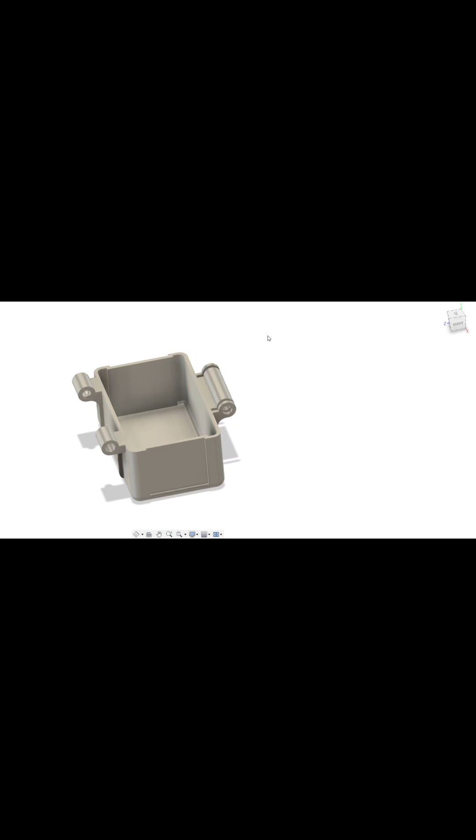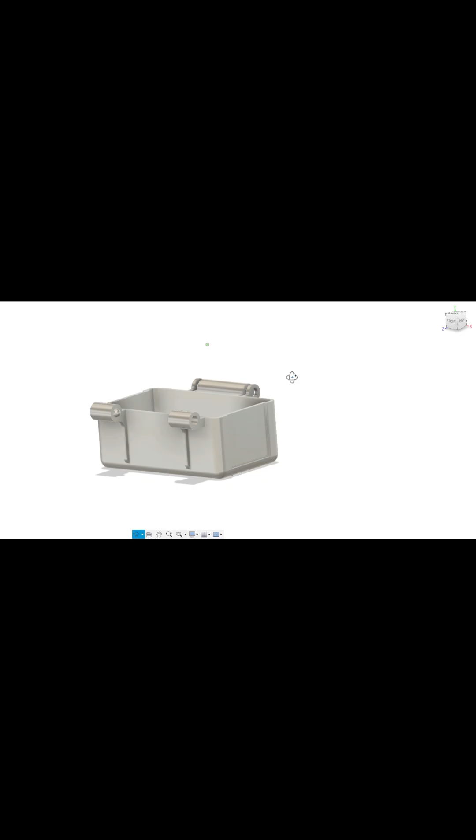Alright, so we got a basic extruded component here. And the aim was to use this component twice over within an assembly to create a hinge and a retainer. So just looking at the single individual component by itself, you can almost see how we could manipulate such an assembly to use just one component to have an encasing.

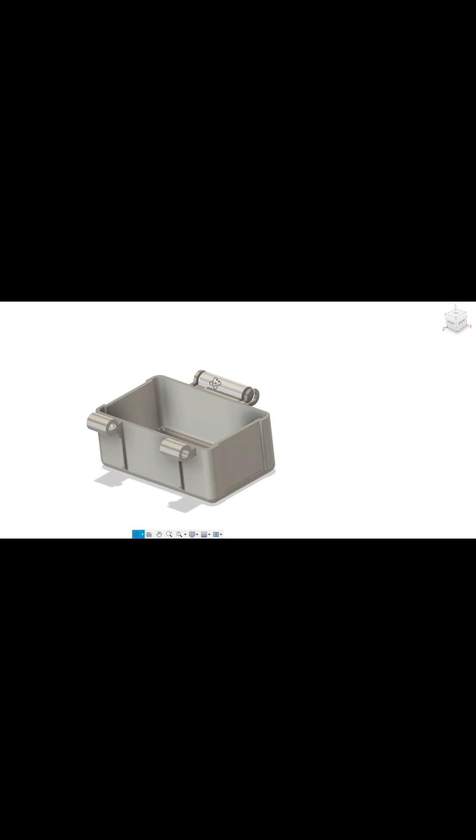We're going to see from the 3D print a little bit later on how that all works out, but some of the improvements that we can make on this design to make it more effective to what we want it to do based on the printout is, well, firstly let me speak about the print, and then we'll speak about how this would be injection molded and some of the considerations that we need to take into account when we're injection molding.

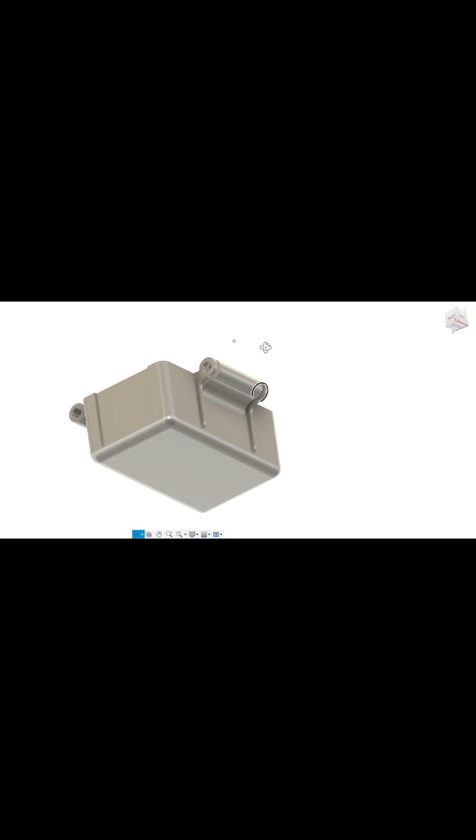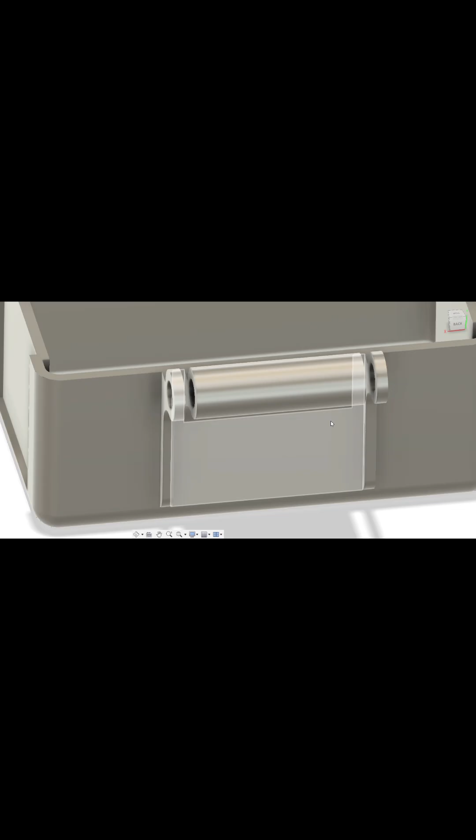So looking at this component as it is drawn right now and how it's come out on a 3D printer, one aspect that needs to be added to this design is you could almost add a detail tangentially over here, a return, or maybe even fill out this material here where we've got the snap detail in the hinge, because that's going to allow us to unhinge and uncouple when we go to the other side. Now this is going to make a little bit more sense when we go into the assembly, but for the purposes of this part of the exercise, we'll just look at this as an individual component.

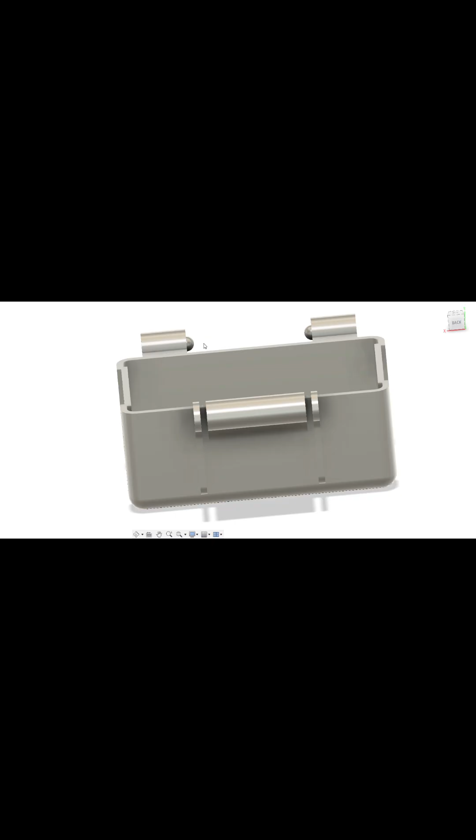The tolerance between this mating face and this mating face here could have been tightened up, so I think we could probably run about half of what we got. We got about a mil tolerance on both sides, but we could probably go about half within that. Another thing to consider is the distance of this snap ball hinge component. This is kind of doing two things. Yes, it is snapping to make a retainer, but also it is the axis for this hinge to open with.

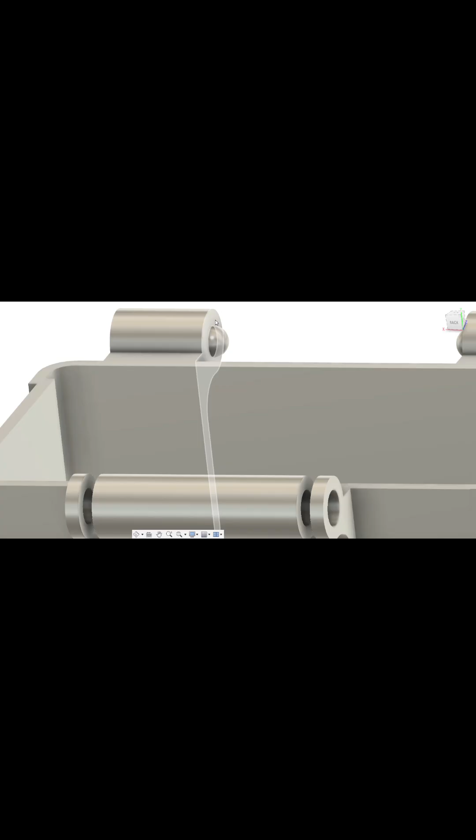Okay, so you can see I've drawn the sphere halfway through this mating face. Now we could really push that in a little bit. That'll give us a little bit more tolerance, but I think it works well enough, as you'll see within the demonstration.

I think really all we need is to increase this material, maybe just a mil or so, or if we're considering injection molding, since this is just a prototype component, we might choose a material that gives us enough flexibility to achieve what we wanted to do by just adding tags there, which when I played around with this after it's been printed, you can see it works reasonably well, with the exception of adding some tags.

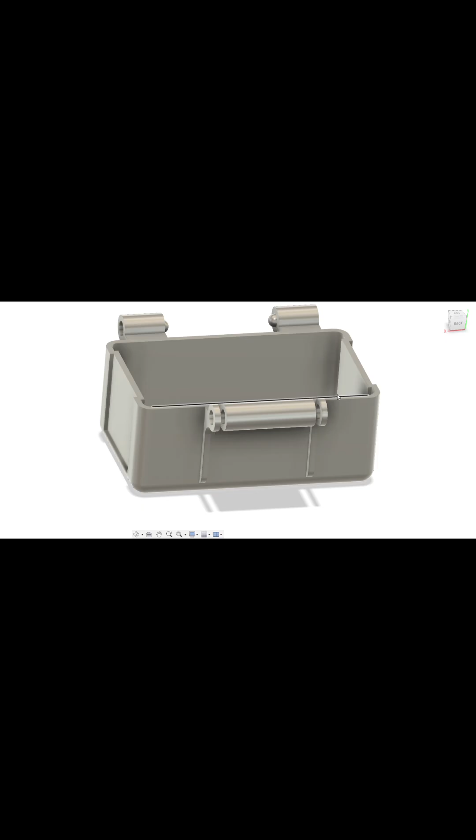Another little improvement is we could run a return on one of these faces, but remember we're using the same component to create a case, right? We have to be strategic on where we put a return on the inside, so that when the assembly is made up, you've got a mating face on the inside that stops the box from rocking to and fro. Now you could really just put that over here, and you'll see when we go into the assembly how that would work.

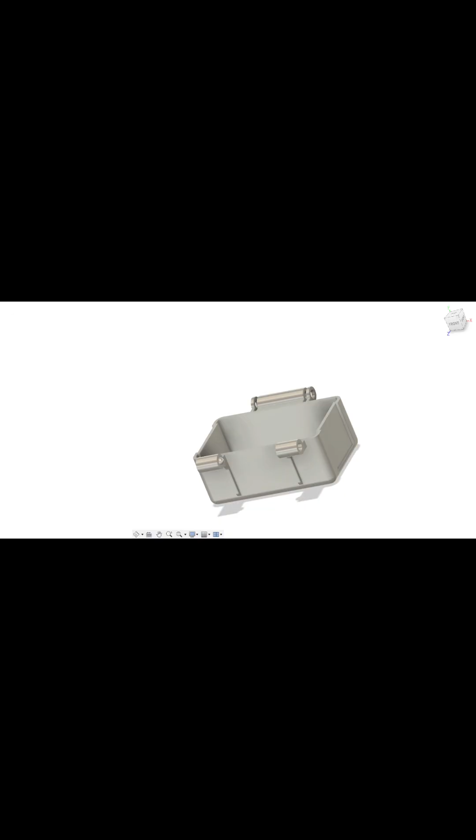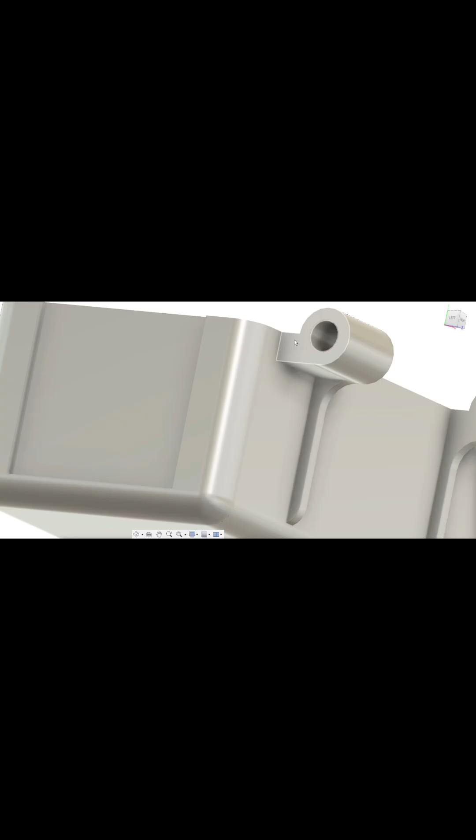Okay, so things to consider when injection molding: probably need a couple of draft angles on the inside. This first extrude we can see here could probably be drafted out before we shell it. And then also, there's a lot of material here that's not material thickness, so that's going to need coring out. Right, that needs to get cut. So you can see I've cored out this to be material thickness, which is about 3 mil if I remember correctly how I've drawn it up. So we've not got a lot of material in here as such.

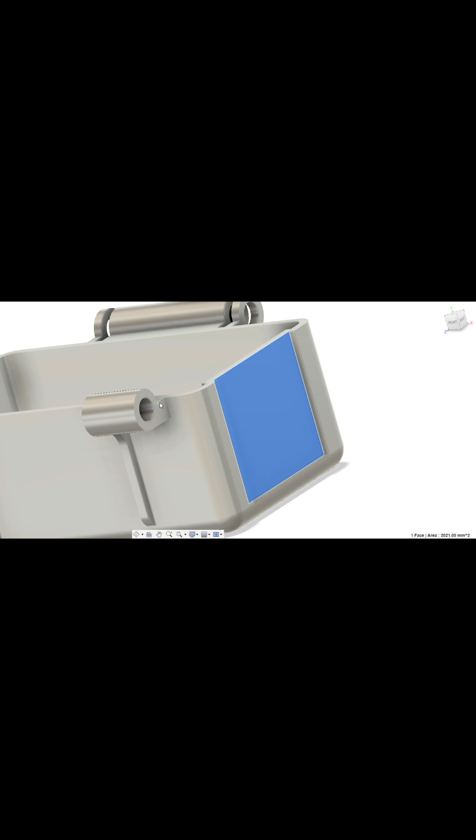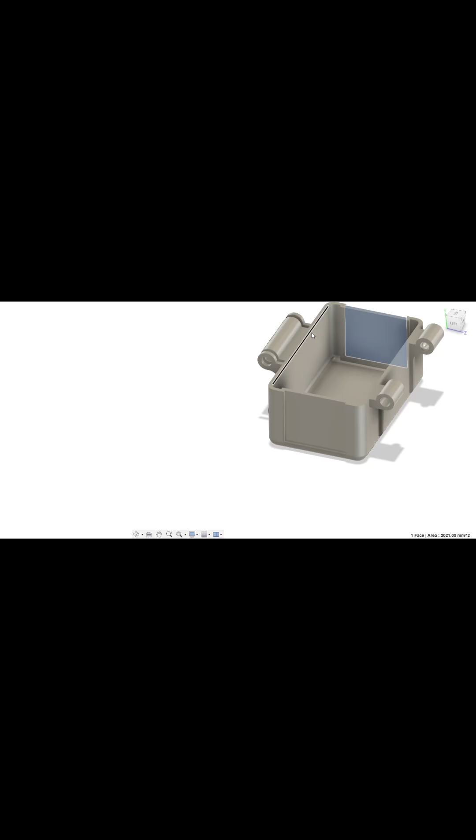But if I was gonna get this tooled out, I'd be thinking about cutting this and coring it out. So we've got the attachment points, but also we haven't got that thick buildup of material where you end up with sink marks on here and potentially some warpage along this face, just given how much heat is going through that part. I think the same thing applies for this side, of which you can see I already cored a part of that. Probably go in further and core that a lot. Think about it cooling. We've got a lot of material attached to this face here, and that's just going to cool at a different rate to that face.

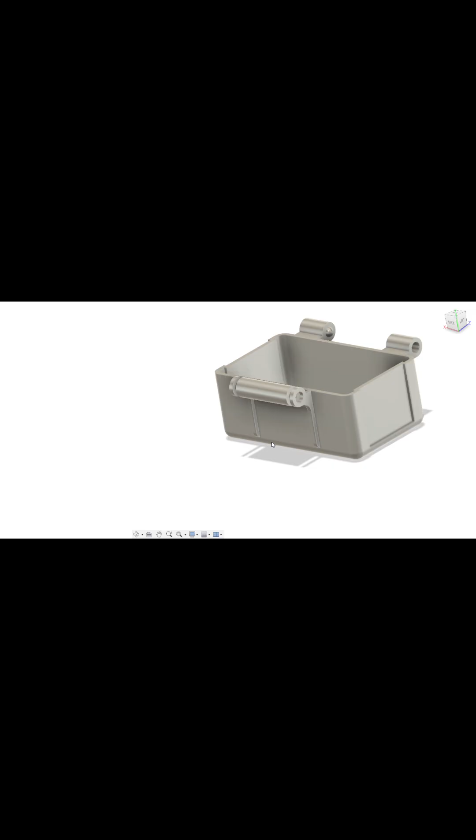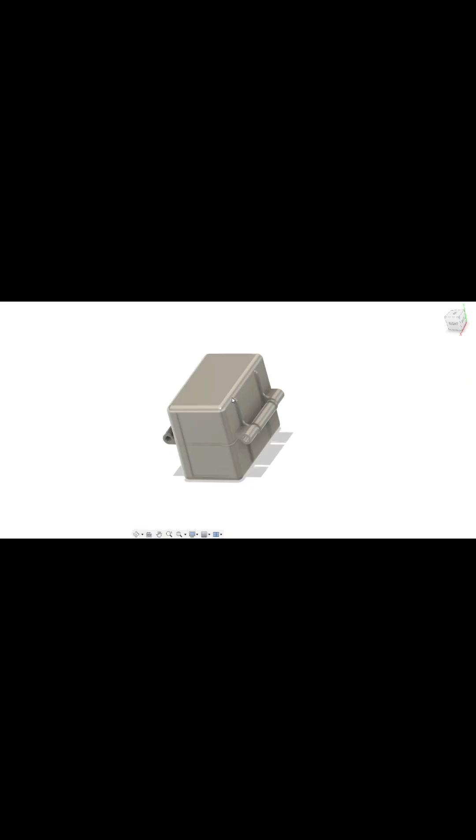You can see it just snaps in there. Those interference faces, remember, because we've got this gap in between - those interference faces, with the addition of these tabs, those mating faces are going to snap into locking position. And the beauty of this design is we can open it from any direction.

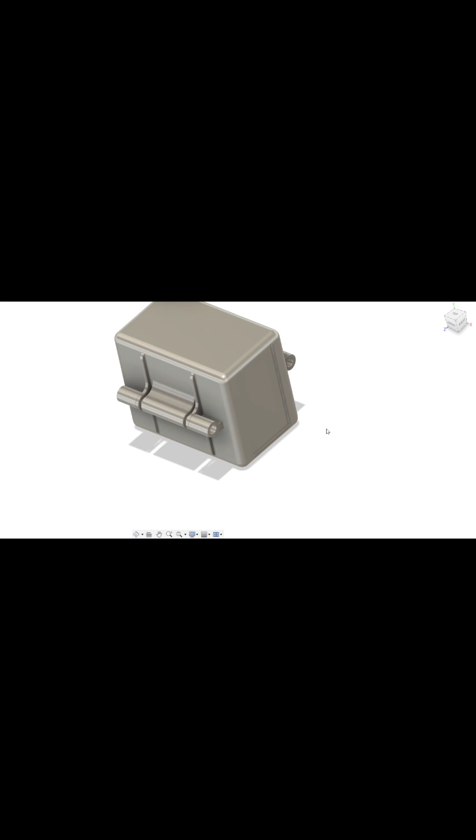That was the intention, that was the goal. Very simple model, but with a little bit of thinking you could take something very simple and make it quite smart, if you don't mind me saying.

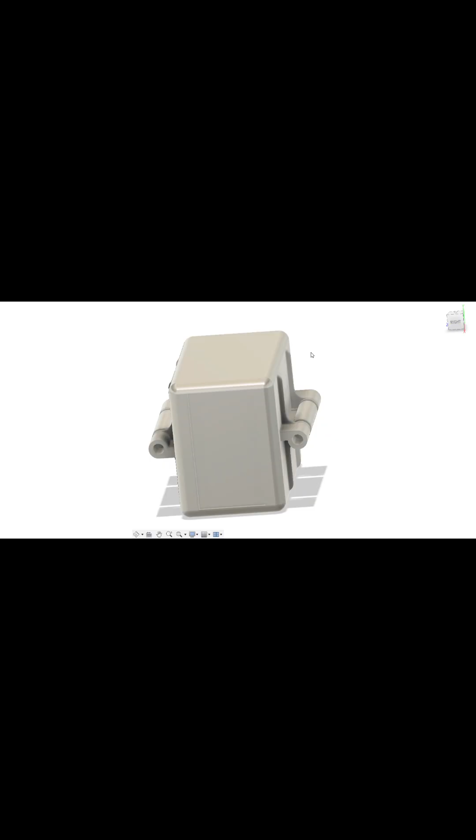So we've got the same hinge mechanism on the other side because it's the same component rotated round, lifted up and rotated 180 degrees about the y-axis. So you see it's the same component, just rotated round, and you can see how this design works.

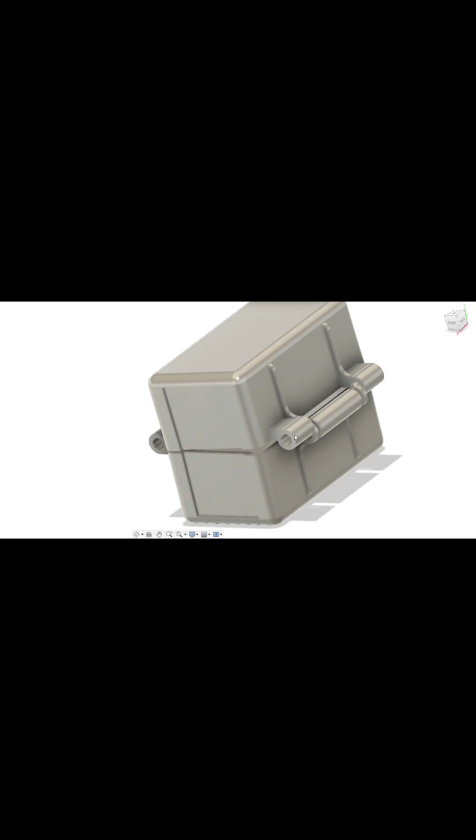So I can open this. I haven't modeled it to open in both directions, but in reality this can open both ways, and both faces, or both hinge mechanisms, act as the retainer to the other side, which I think is pretty cool.

I'll probably look at this design in the future - I won't do another video on it, but I'll make those refinements we've spoken about. Put a little tag over here, but remember, whatever we do to one face we're doing to the other, because it's the same component. So we'd probably have to think about putting one tag over here, which ends up being over here too.

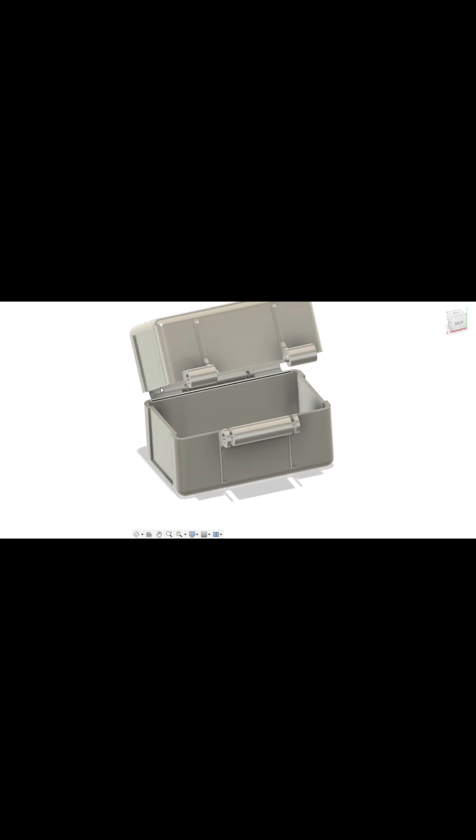Nothing that wouldn't work pretty nicely. That'll become a means of making sure the assembly doesn't rock, which when you see the model once it's been printed, it does rock a little bit, but it's pretty good for what we want to do with this exercise.

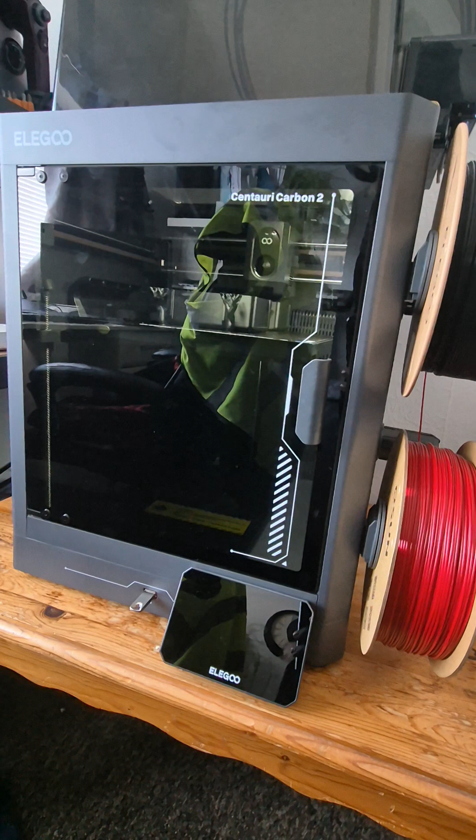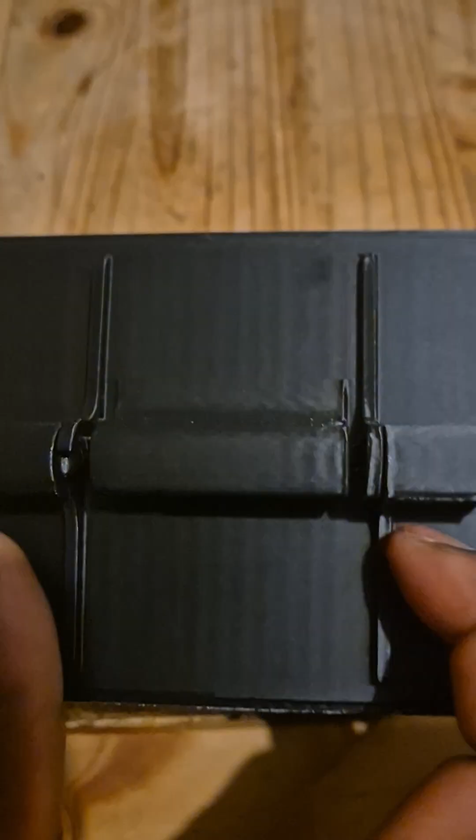Another idea that comes to mind in improving this design is you could probably have some tabs over here to bring these snap joints in from here. So that's going to help us open and close. You can see it opens quite nicely.

And again, like I said in the previous excerpt, if I was to open it from the other side, you would probably want some tabs underneath, or just a little bit of overhang, to bring that snap joint in, and you can open it from the other side. But considering I just eyeballed this, I'm pretty happy with how it's come out.

Let's close it up. It's open now. Put it in retainer mode. There you go. Pretty nice.

Right, so you can see this is now printed, and it's printed out reasonably well on my CC2. When we looked in the CAD, we saw the hinge mechanism is also the snap retainer, and we can see that works really well as a hinge.

That works really damn well. You can see, I can pull this up, I can swing it, it's not coming out. When we close this, it snaps really nicely into place. You gotta bear with me there, trying to do this with one hand is not the best. You can see it's closed, and that's all one part.

So areas of improvement - if we're going to print this out again, we're probably going to give it a bit more tolerance in between these gaps here, and that's going to give us the ability to open it from both directions, because you can see I've already snapped one of these. So that probably wants to be thicker - maybe 5 mil, it's 3 mil at the minute.